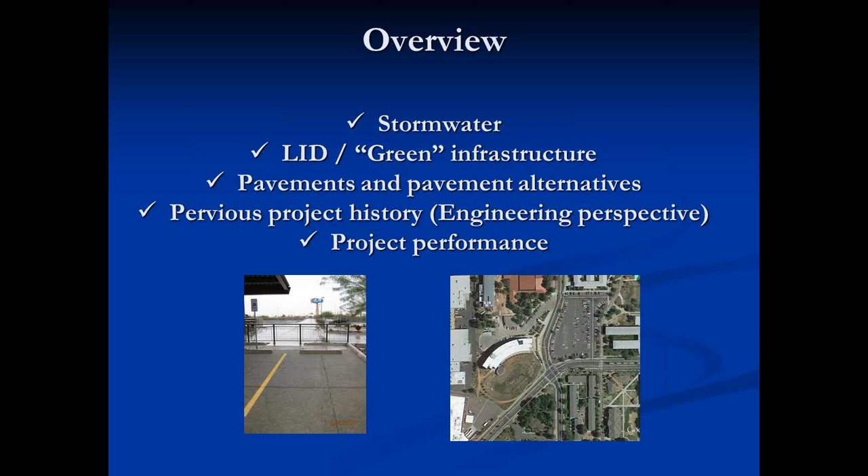Low impact design is the same concept as green infrastructure down here in Tucson. They're called different terminologies, probably regional applications. There's probably a way to meld them both. Maybe low impact green infrastructure would suit people's thought process that don't deal with it all the time. Conceptually, it's just a way for engineers and public representatives to build infrastructure that serves the public better overall, certainly as we heard in this morning's first presentation.

There's a lot of benefits that come from stormwater. Stormwater, as we all know, is just what falls out of the sky. According to the NPDES and EPA quantifications, that's all it is, the rainwater. As it hits the ground, it starts picking up constituents along the way. Rainwater in and of itself is not harmful, other than what it picks up as a result of the evaporation process, but where we run into problems is what it picks up along the way - from undeveloped lots, from curb and gutters, from streets, stormwater systems, etc. As you can see with natural ground cover, you have very little runoff.

Development is what impacts this number. So the 10% runoff goes up quite a bit as your impervious surfaces do. Impervious surfaces are sidewalks, curb and gutter, pavements, roofs, private development - anything that keeps the rain from getting directly into the ground. Larger impervious surfaces increase the amount of runoff, and when you get to 75 to 100% impervious, you can see the runoff generated goes up quite a bit.

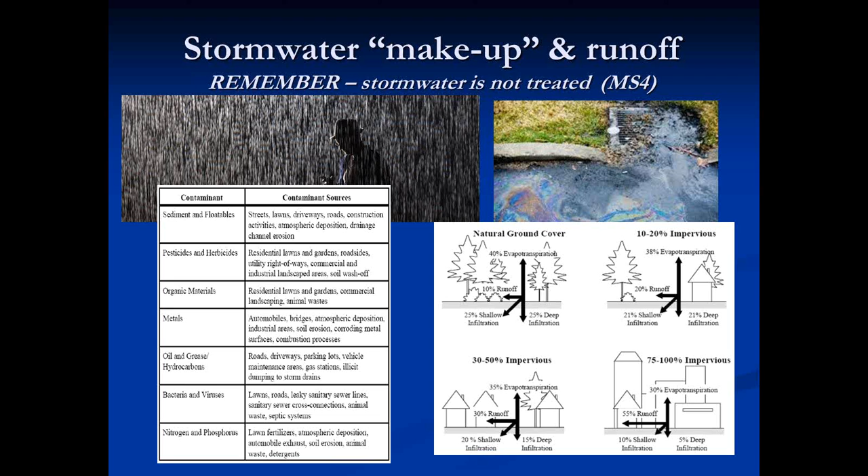I won't spend too much time on this slide, but how much water do you usually talk about? As engineers, we like to look at the volumes of water. This is an equation we use within the city of Glendale to calculate for a development that comes in wanting to put a building on an acre of property. How much roof are you going to have? How much parking lot are you going to have? Where is the water not going to be able to infiltrate into the ground?

This is a big number you'll hear about as you get into meetings with engineers and developers. This says 95% of the water that hits a pavement is going to run right off. So for our park and ride facilities, at a 100-year event, which is our design standard, there's 240,000 gallons of water that come out of that event. If we have an impervious surface such as asphalt, all of that 240,000 gallons is going to run off the lot. Cities are responsible to retain the stormwater as well.

We just don't require it of private developers - we require it of projects we build internally. And one of the most expensive parts of land development is the land. So what pervious concrete enables you to do is capture the stormwater that you're required to do by the ordinance and not take up your footprint or your property basins to be able to do it. So basins use a valuable component of what the investment is. Why not eliminate them? And what can we do with all that water?

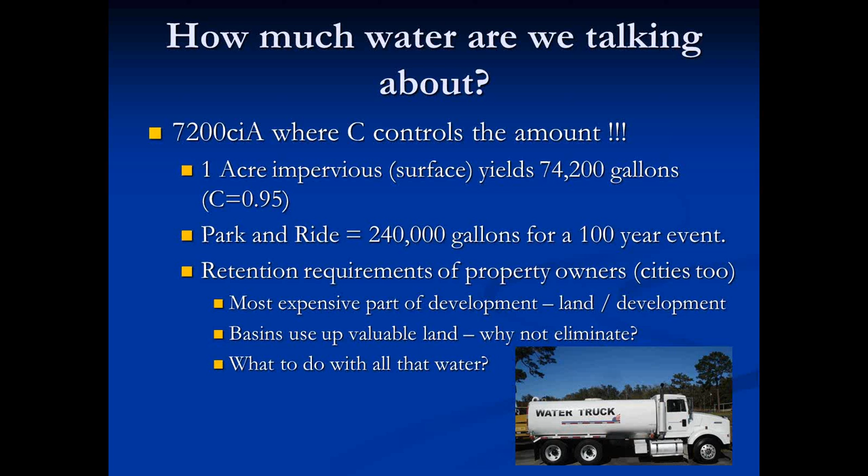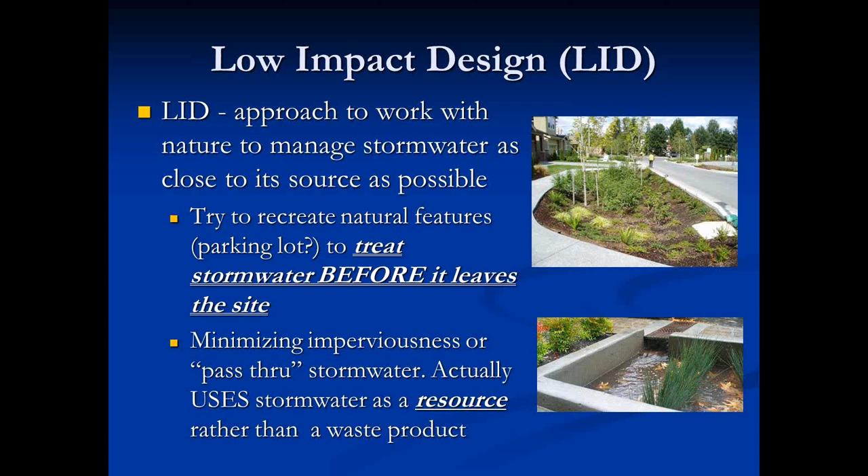The low impact design or green infrastructure approach is you want to manage that stormwater. It used to just be let go, looked at as a byproduct or an undesirable quantity. As you realize, the philosophy is changing - we can use this stormwater. We can use it to water plants. We can have it go in through swales. We can provide vegetation and retention basins, and we can capture it off of the roadway and use it to water the plants adjacent to it. But what we want to do is treat it before it leaves the site. We want to minimize the impervious pass-through stormwater, so we want to use stormwater as a resource rather than a byproduct, if you will.

One of the things that drives low impact design from a municipality standpoint is the NPDES permit, the National Pollutant Discharge Elimination System, that most large cities and smaller cities coming under the umbrella now require. This is a mandate by the federal government. All cities have to have an NPDES permit to control their stormwater, and it's this program that requires LID and green infrastructure that cities start implementing these policies and procedures.

In the Southwest we don't get a lot of rainfall, which is where the park and ride comes into play. A lot of this vegetation can't be serviced only by stormwater. We still have to have additional water sources, irrigation, to supplement the summers and such where we don't get a lot of rainfall.

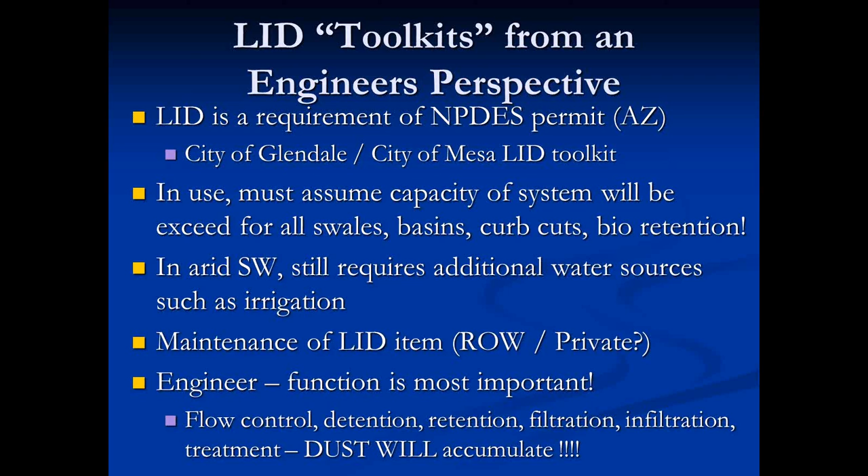A couple surface types we're all familiar with: flexible pavements such as asphalt. It's much cheaper than concrete. A lot of state highways, and some interstate highways, are done with hot mix asphalt.

We are starting to use more surface type treatments in parking areas and such. We have Portland cement concrete pavement, which makes up most of the interstate system within large regional urban areas such as Tucson and Phoenix. You'll notice all of the interstates are done in concrete. It's high cost, but it has long durability.

The last thing we have is surface treatments we use, like pine tar emulsions. That's another way to get a drivable and stripeable surface. There's a lot in Glendale up at the Thunderbird Conservation Park, where we actually mixed an emulsion with a decomposed granite to get a drivable surface. It's about the same price as asphalt, but for a conservation park, we didn't want to just paint everything black.

Sheet flows that come off of these three types of surfaces lead to higher flows. When I showed the earlier slide of the amount of stormwater leaving a site, it goes up dramatically because of the imperviousness. All of this water, as it leaves the site, gets into waters of the U.S. We see all these rivers around Phoenix and Tucson in the arid Southwest. Whether there's water in them or not, those are all considered waters of the U.S. Same down in Mexico. They might not have water in them all the time, but eventually the stormwater is going to pass through sites and get to those areas.

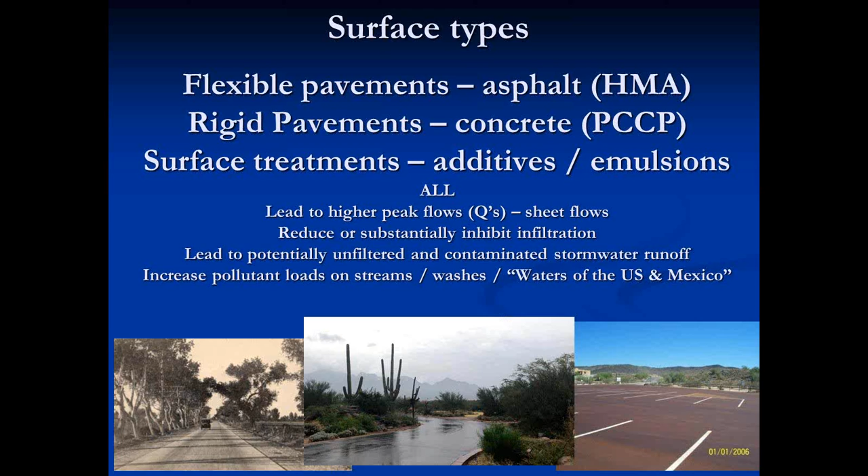So what are some options to get rid of the concrete or asphalt pavement? There are a lot of products out there: geopavers, geogrids that enable vehicles to park on them, paving blocks we've all seen, and also open lattice paving blocks. Unlike Portland cement concrete pavement or asphalt, these allow the stormwater to actually get through and capture some of that stormwater, using it as an attribute.

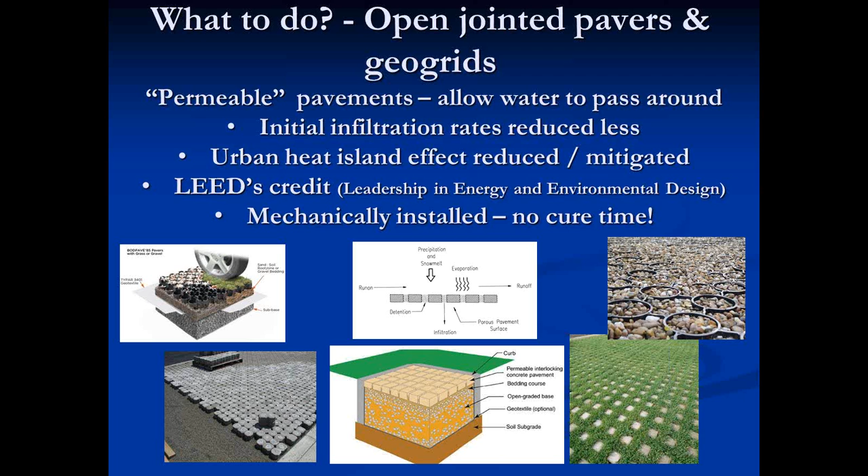They also reduce the heat island effect that we've all heard about. I'll have a slide a bit later from a project up in Phoenix. So a couple other things we can do other than some geogrids and some paving blocks is pervious concrete.

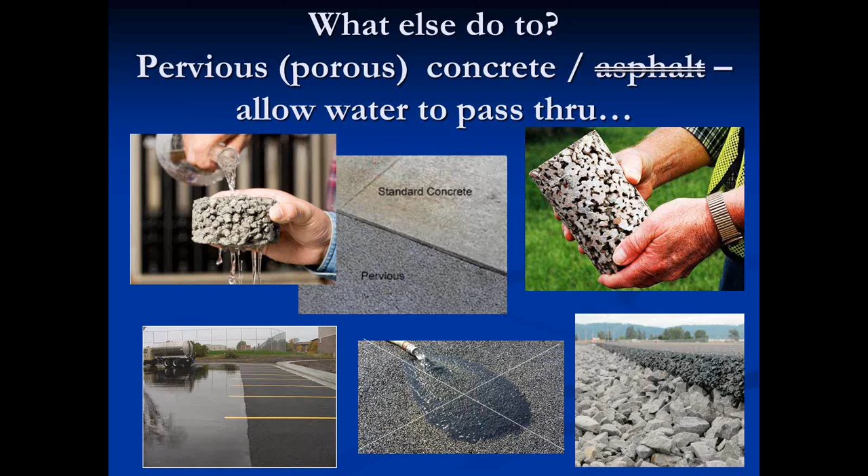We started looking at it as a result of a consultant we hired for the park and ride. The original concept was hot mix asphalt—cheap, easy, quick: pave it, put some ABC down, throw some standard canopy shades up, and we're done. But our council saw an opportunity to start looking at some other technologies back in 2003, 2004.

They had looked at some of the components I discussed earlier, like gravel pave, grass pave, geogrids, pavers, et cetera. We opted not to go with those because of traffic implications—you've got people parking at the facility, walking across, getting onto buses, and being bused to work, so you want a friendly surface for that. We also upgraded the shade canopies, and through those discussions the city council provided direction to use pervious concrete, which was presented by Jacobs Engineering, our consultant at the time.

And I met for the first time Dr. Kaloush out at ASU, who turned out to be a very valuable resource through this whole process. I still sit on that conference committee out at ASU where I see him often. He is very helpful in any conversations I have, and I think all of us as professionals, as we get pulled in different directions trying to use new technologies, it can seem overwhelming. But I think most of us, and Dr. Kaloush certainly, are willing to pick up a phone or answer an email, and through those dialogues I was able to come up to speed very quickly. I think we're all willing to share that knowledge, you just have to ask. That thought process has served me very well in my career. Why reinvent the wheel when there's people around you willing to help?

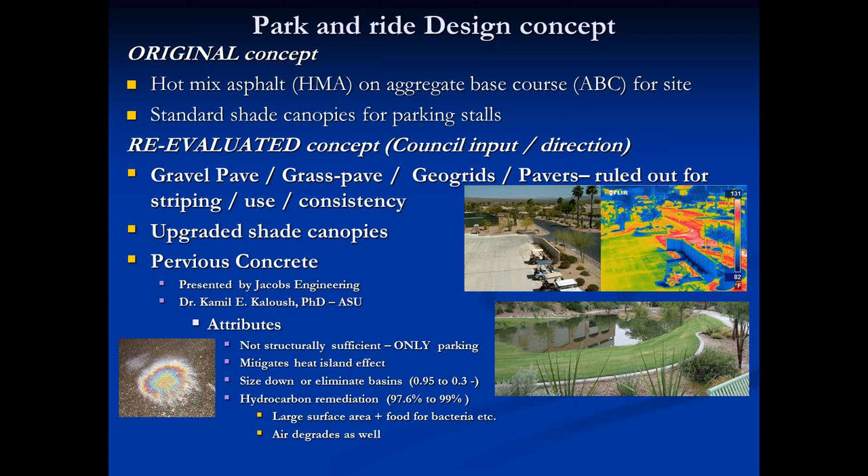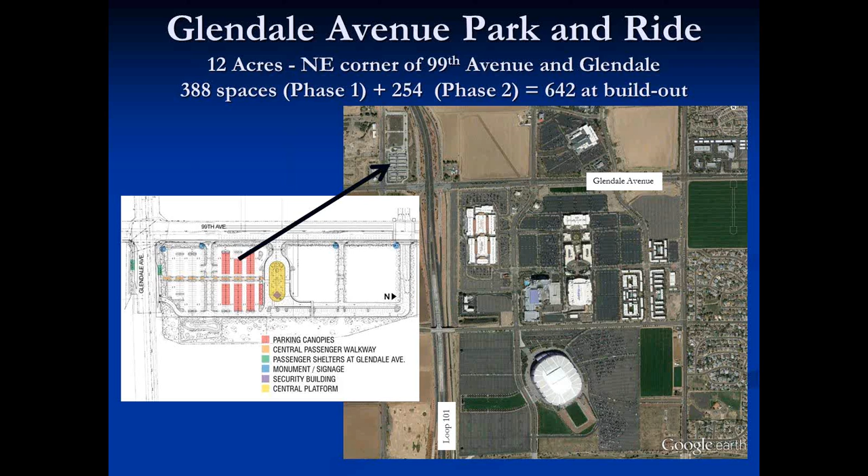The biggest thing we worry about as engineers is the cost. It's much more expensive initially than hot mix asphalt, but over the life cycle of the product it's actually a little bit less. It makes more sense to do for all the reasons we've discussed: eliminating imperviousness, cleaning up oil, et cetera.

The other big concern, more on the engineering end, is how it's going to work. We all see technologies come out and hear nightmare cases, but as an engineer, the first thing I thought of here in Arizona or northern Mexico in this region is that we get very little rain, just big dust storms. The whole thought process of this pervious material is to have a matrix of stones to allow stormwater to get through. It doesn't do us any good if it eventually plugs up with dust and such.

Another concern we had was that there's no water in the mix, or very minimal amounts. It's unlike regular concrete you see driving to work — it's still delivered the same way, but regular concrete has a large amount of water, and you can chill that water before mixing to bring the temperature down so the cure process doesn't start too early. Pervious doesn't have that ability; there's very little water in the mix. So we were worried about when we would be placing it, and about increased maintenance costs for a product we hadn't dealt with before — our streets department never deals with it.

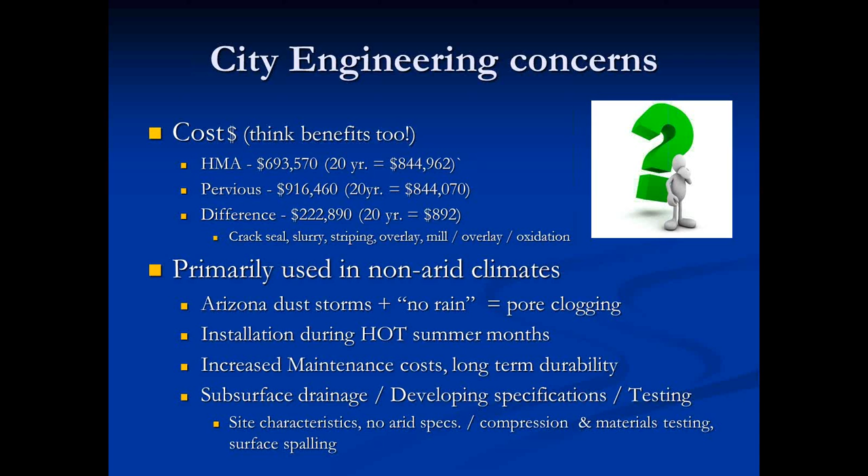Some more thinking, I won't get too much into these, but these were some of the things we ran into. One of the big things is temperature. Concrete can't get over 90 degrees before it's placed. That's what we've learned over the last 100 years. It's detrimental to the ability of the concrete to set up.

We had to increase this to 95, knowing that there's very little water in the mix to keep that temperature down. Then we had questions on how do you test it? I've been dealing with materials for 35, 30 years, and it's always how do you test it? You can put it down, how do you test it? Pervious concrete has a lot of non-conventional ways to take a look at it.

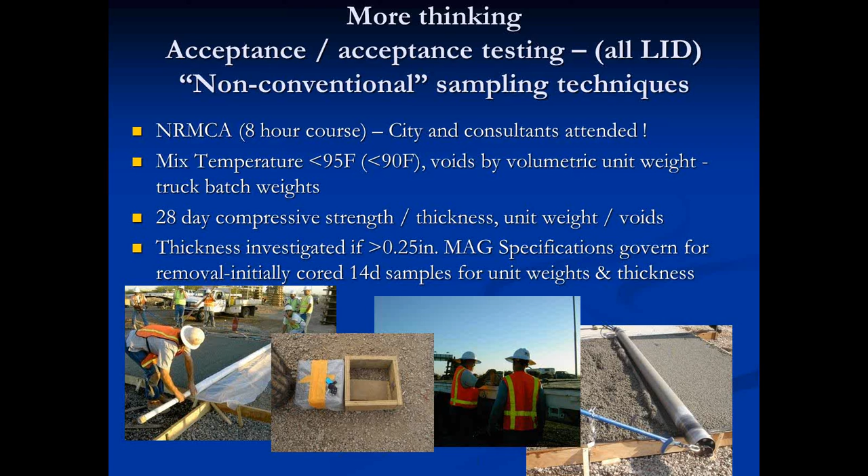So as I said, there's very little water to keep the temperature cool. When is the worst time to start placing it? In August. So when did the project schedule work out that we started placing it? The time when we didn't want to.

We started placing it in August in 2007. All of the placements went at night because we knew temperature was a concern and we had no control over it, and couldn't control the temperature of the mix with the water introduced to it.

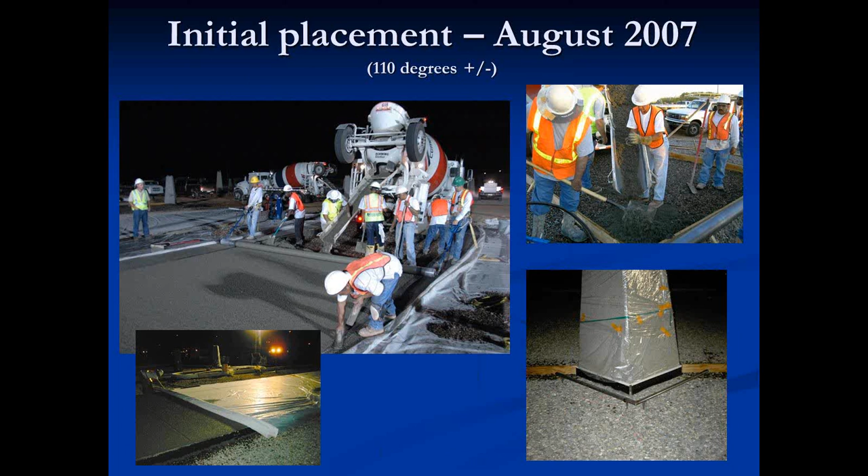So our placement continued from when we began in August, probably through the end of October, maybe early November. These are some pictures. You can see it's delivered in a ready-mix concrete truck. This is actually a lot out at ASU.

This is a site that we visited before we started looking into our project. Dr. Kaloush was doing this lot at the ASU Arts parking lot on the ASU campus right off of Mill Avenue. So it's placed with a ready-mix truck.

It's not really compacted, it's more leveled with a rotating screed. This does not vibrate, and you can see these guys just pull on it. It's rotating the opposite direction of the pull, and it just smooths the surface.

Afterwards, they cut joints in it with what looks like a pizza wheel. Literally, that's probably about a 40-pound pizza wheel. They just travel it to and fro and give an expansion joint. There's no conventional expansion joints like engineers are always used to.

And then as soon as that material gets placed, it has to get covered. Certainly because of August, or because of the time, the cement inside of the concrete needs time to hydrate. If it dries out, you won't get any compressive strength. So everything has to be sealed with plastic to allow it to cure properly.

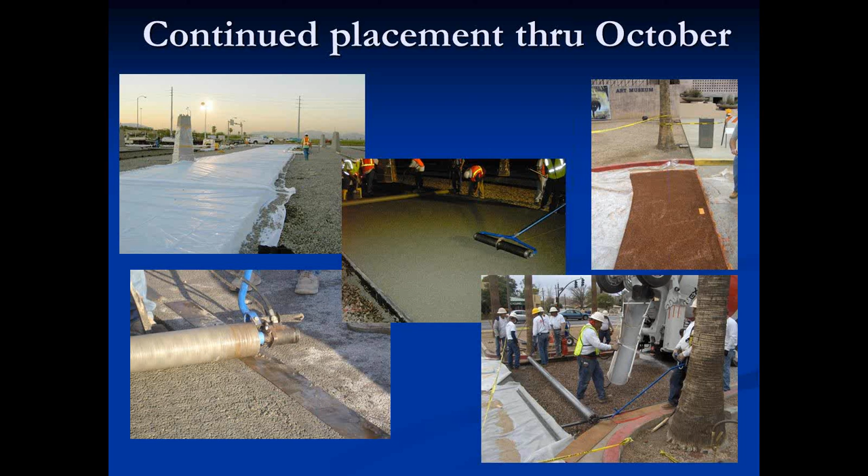And you can see from the Arts College, you can even add coloring to it. They had a couple areas where they were trying a few different things. That was the first placement by ASU. They added color to the mix, which is always an option.

Construction continued. We had a lot of canopy installation. We had heavy equipment on the mat itself. You can see they're fancy canopies, if you will. Well, these had to all be brought in by pneumatic forklifts. That was a concern of ours, imposing heavy wheel loads on it. It did not turn out to be an issue.

Here's an area you can see, this is the dry bus aisle right here. You can see this is during a rain event. There's no water at all ponding here, while everything is ponding on the asphalt. So that's once again what it's meant to do: capture everything and send it straight through the matrix.

Here we've got the canopies going in. You can see panels curing. These are bio swales, if you will, that were planted. And this is the area at night, before the canopies went on.

Interesting story: all these lights were designed to face up, but they hadn't thought about the rainwater coming off the roof, which promptly filled all of these light canisters with water. So you can't catch everything. They had to come back and redesign a water seal. There's other things, as we all know, that come up in projects that people generally don't anticipate.

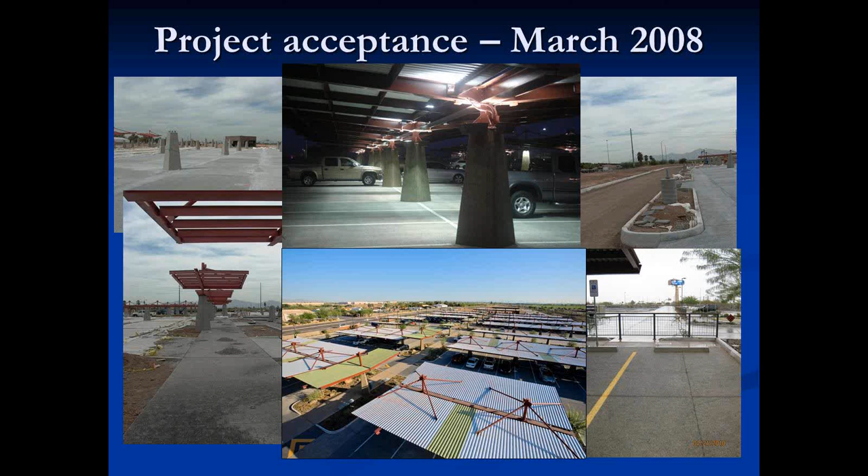This is the bus drive aisle here before it went in. Buses come in, pick up people at one area, and then they leave the site through here. So once again, it will support those heavy wheel loads. But the biggest component, like I said, is that it captures stormwater, cleans it, and stores it or sends it on its way.

This is a quick map. I was so worried about the new product, and I had never used it.

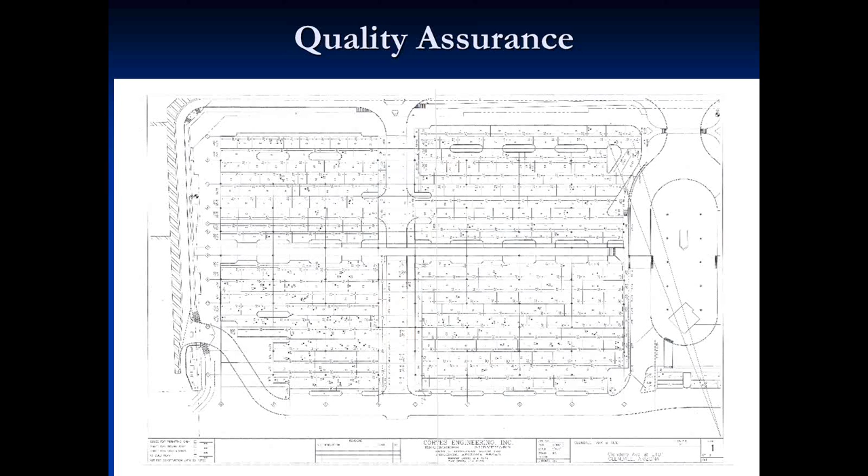Now that I visit it every 2 to 4 years, if I see things in the pavement, I can pull up the exact records from the exact truck and look at the mix that the plant sent out to the site to see if we start developing any problems, and trace them back to the materials. It's great to build this stuff and everybody walks away, but if you start having trouble in 5 to 7 to 10 years, you miss an opportunity to look back and figure out what happened if you don't keep these kind of records.

So this is a quick technical screen. Average strength, about what you would expect in a low strength concrete, 2100 PSI, unit weights, temperature, only one load. Our specifications allowed a load to be rejected if it was greater than 95 degrees. We only rejected one load in 2.5 months of placement, which is pretty good, and I think that lends itself to placing at night. Stockpiles were pre-wet at the plant to try to get those temperatures down.

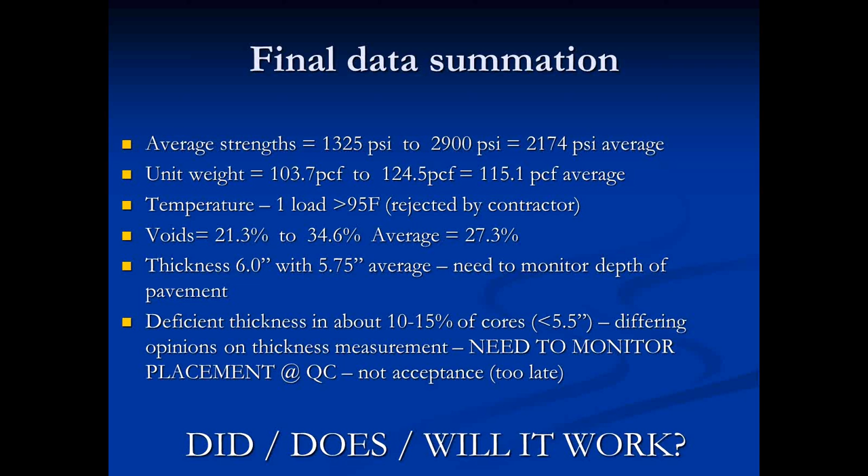Thicknesses, we had a little bit deficient thicknesses. We were able to monitor that and try to figure out what the issues were. Well, all this placement and field data is wonderful - does it work? Did it actually work for us? You'll see these next series of slides as I visit the site.

Here's what it looks like 2 years, a little over 2 years old. I had a little bit of the joints opening up, very minimal at best, which was expected - was not nearly what I thought it was. After 2 years, we had some panels that cracked more than others right through here.

We had a contractor that was beyond his warranty. Usually we used to require a 1-year warranty, now we require a 2-year warranty, so if anything happens, the contractor comes back in and fixes it for free and brings it back up to specs. Well, this contractor was outside of his warranty - could have said sorry, you're on your own, you're outside my warranty. They were very good, we were very fortunate in the contractor that we hired. Mike Riggs, who was with Progressive at the time, showed up with way too many people and came in guns blazing, wanted this project to be a success. So he came in a little bit over 2 years and replaced those panels, jackhammered it out, had to reorder mix that the plant hadn't made in 2 years, and we reinstalled those.

Got a little bit of differential settlement. You'll see these 2 pennies laying adjacent to each other - they were off by about 1/4 of an inch between the two. It was only one area, so I haven't looked at it to see why it was. Might have been thermal related, might have been expansion related. Didn't get any cracking adjacent to it.

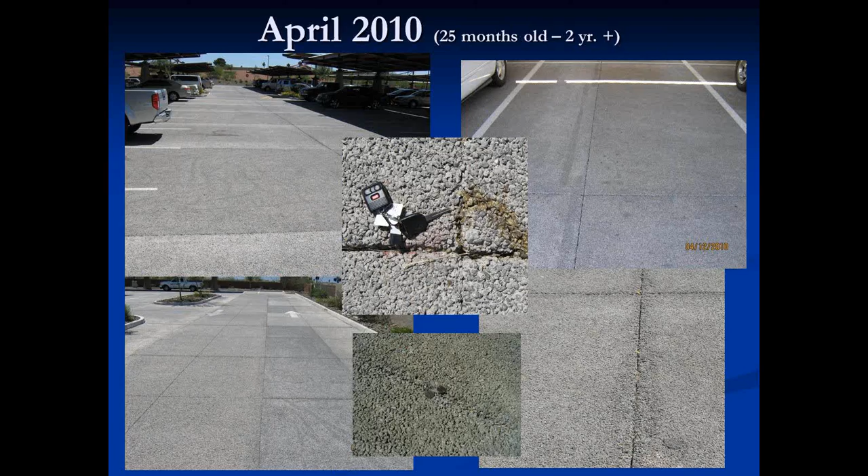Let's move up to 5 years. You can see we're getting a lot more oil. Facilities actually being used, which is wonderful. That's what it was there for.

We're getting a minimal amount of surface spalling, which was anticipated in working with Dr. Kaloush. That is one of the things, you get some pebbles that come up. It has been minimal at best.

There's the crack 5 years out. Had the keys out, it's still in place. Has never been repaired. I get a few cracks through it, which are expected. You can't keep anything from cracking forever.

This was an area we were worried about thickness in construction, so we had the contractor come in. This was at construction, which would have been about 4.5 years earlier. Saw cut a section out, verify thickness, and then we had him run some testing on this. Here's the saw cut lines.

I wanted to keep an eye on this because I was wondering, is that going to crack, chasing a weak point in the matrix right here? Hasn't done anything from the time we saw cut it.

And then I'm getting a little bit of debris because of the landscaping. You want to keep fine gravels for landscaping away from the adjacent area to this, for fear it might fill in the surface voids. So you can see it's getting used, 5 years into it.

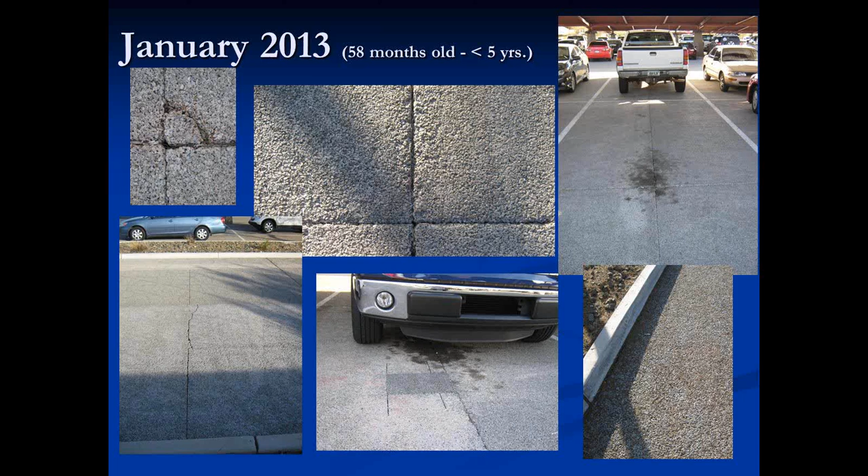Now let's move to last month, 86 months into it, which is over 7 years. Here's one of those other areas. Once again, no cracks chasing it.

This product is restriped. We have handicap underneath the awnings, in addition to regular parking. I'm getting a little bit of the surface raveling just at the joint, which I anticipated, and more oil. Couple cracks, few surface cracks, nothing crazy, nothing opening up.

So for 7 years, we'll get into a slide on what they're doing to maintain it, but nothing to fix the surface. So what did we expect at the start of it, or what certainly did I expect?

Surface spalling, got some of that, minimal at best. Crack propagation, I think, has been to a minimum. The cracks I had to look for, there aren't a lot in this area.

It's about 3 acres. Got differential settlement, the only area I saw was what I had showed in the picture with the 2 pennies that were separated. Getting a little bit of joint expansion where those joints are probably 1/8 of an inch, and not all of them, just in certain areas.

And I was worried about the void structure. Will it still drain what it's supposed to now that it's 8 years old?

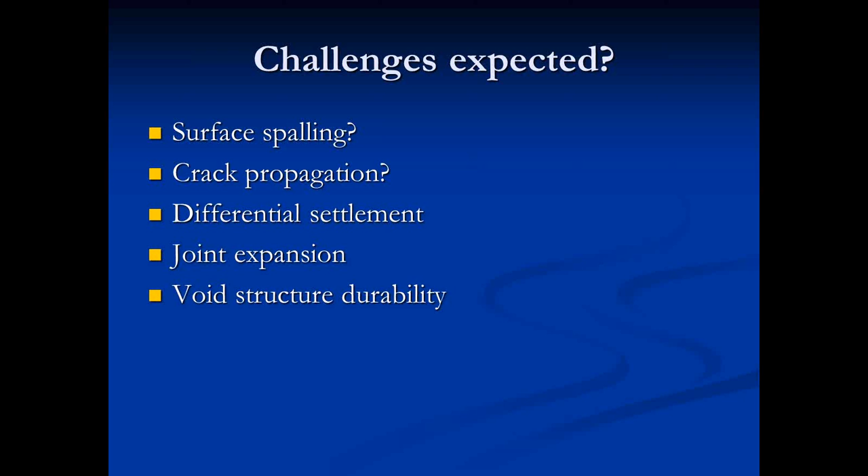A couple maintenance items. Our transportation department is who owns the lot. It was their funding that paid for it. They flush it 4 times a year. They'll get somebody in there with the water truck, park it in the heavy traffic area, and actually flush the area down, trying to wash whatever might be in that void matrix down through it.

We have a contractor inspect joints for crack and debris. I'm always out there, always out there during rain events, trying to be out there during rain events. This is a maintenance routine we followed for about the last 8 years.

And then Mike Riggs with Progressive, he had called me in March of 2012. Apparently the Chinese had a very large highway they were doing pervious. He had a small vacuum truck that he wanted to come out and do a few test runs on our facility.

This is before and after, this is after he made his first pass. We ran permeability tests, which in essence is exactly what you would think: you measure the volume of water and the time introduced, and how fast does it drain.

You can see this is a before and after. Even after 8 years in these few areas, these will still drain 53 inches of rain in an hour, which is 8 times what we would see in an average year. By him vacuuming it, he was able to get it up 70% over what it was.

5% in this area, 16 in this. This is some of the debris. This was a new machine that they were trying to sell to the Chinese government for maintenance of their freeways.

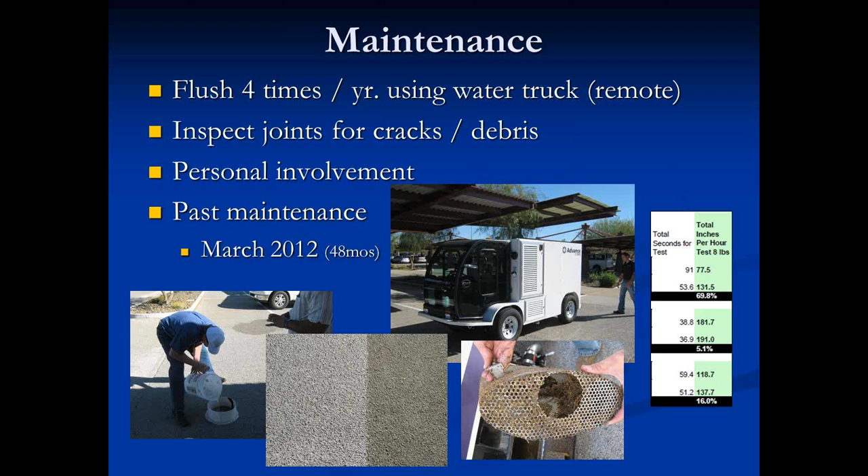So with it being a large facility that's being used all the time, there's a lot of opportunities for visits, research, et cetera.

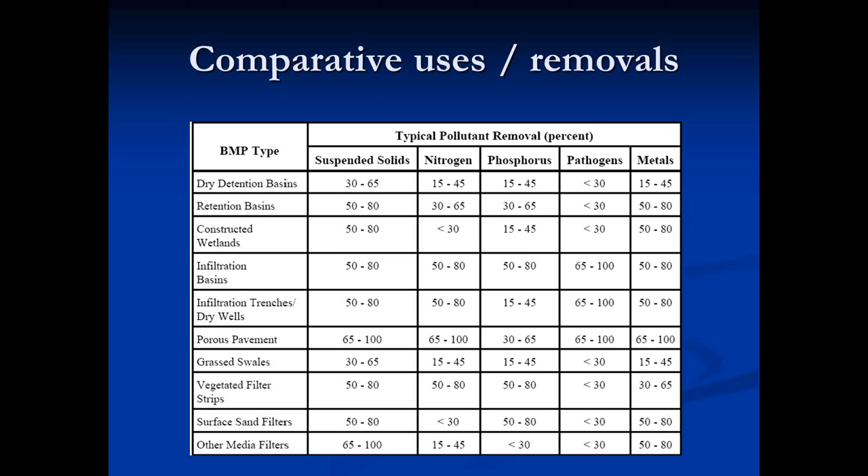Some other projects in Arizona, ASU, as I said, did the art complex parking lot. NAU, I think it was Dr. Chi I've spoken with a couple times.

They did one up at NAU that fell apart, and he attributes that, as you'd think, to the freeze-thaw cycle. Flagstaff has one of the worst freeze-thaw cycles in the country - gets cold at night, gets warm during the day. It happens night after night, so the ice gets in there and cracks everything. They've paved over that lot and are reevaluating how to redo the mix and reinstall it in a different area to try to accommodate freeze-thaw, because he sees the benefit of not giving up and seeing if it's something they can mitigate.

Our park and ride facility, Superlite Block facility in Phoenix, they had done all of their storage yards. I've got other pictures with pallets of concrete block. This is a manufacturer, and their heavy forklifts store all of their product before it gets loaded onto semis and goes out on that pervious pavement. And then the Phoenix Cement Terminal.

Some good references for all of you. Once again, Dr. Kaloush was fabulous through the whole process - I still talk to him all the time on this and other materials type issues. Ken Ricker with RAM Engineering helped us develop the specs.

Mike Riggs with Progressive. There is a YouTube video in this wonderful world of technology - you can watch the placement from the comfort of your own desk. Just go to YouTube and search Pervious, and you'll be able to see installations, examples, permeability tests, et cetera.

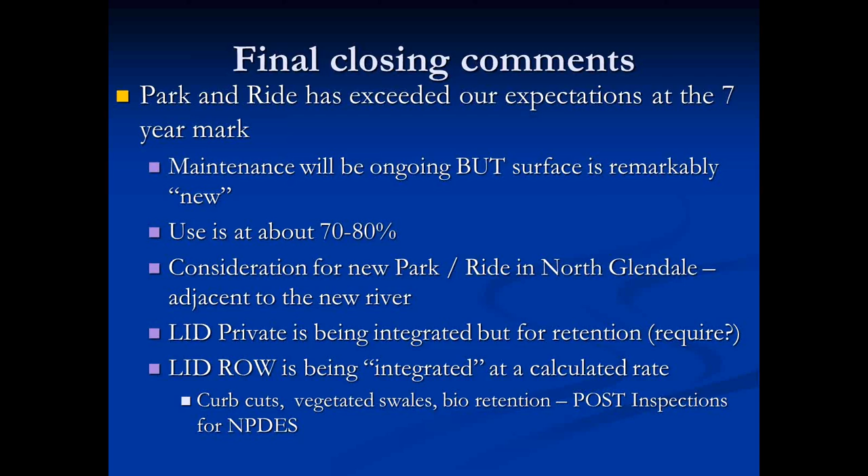And one kudos to everyone down in Tucson - through all the committees I sit on up north, Tucson is always held as an exemplary area to look at in terms of what LID or green infrastructure processes they have in place. It's the first thing that's generally said: well, how is Tucson doing it? So you all deserve credit for having the rest of the state and probably the Southwest look at what policies you're instituting to accomplish it in this area. So thank you very much.